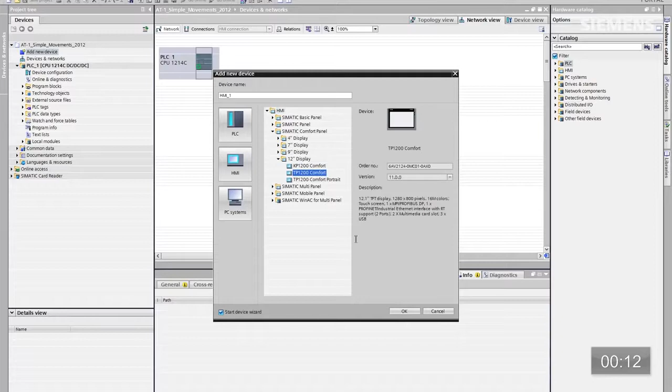So ultimately what the portal is doing for us at this point is creating a wizard for us. We're going to have a pop-up box that easily walks us through the entire HMI architecture we want to use for this particular system. There's a PLC connection as the first button. We're not going to use that. We don't care. Click on Next.

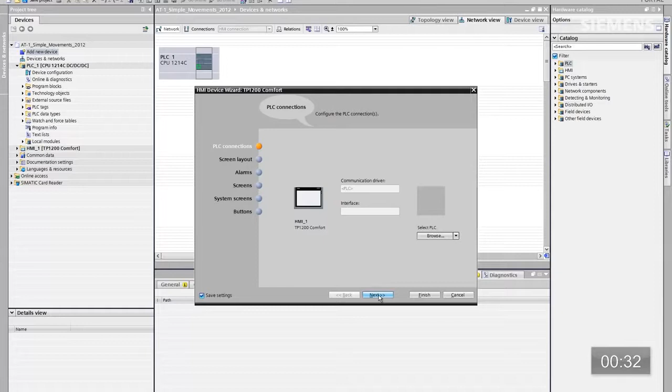You can change the background color here, screen title, navigation field, date, time, logo, whatever. We're going to leave those defaults. Here's the alarms. We're going to keep the defaults as well.

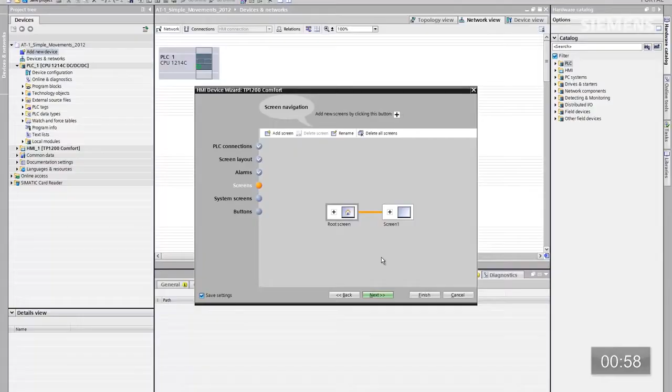The screens. Here you can create your standard architecture of your screens. That way every single time you have a new HMI you can easily go through the wizard and create those screens very fast and efficiently. We're going to leave root screen and screen 1, that's no problem. System screens, we're not going to use any.

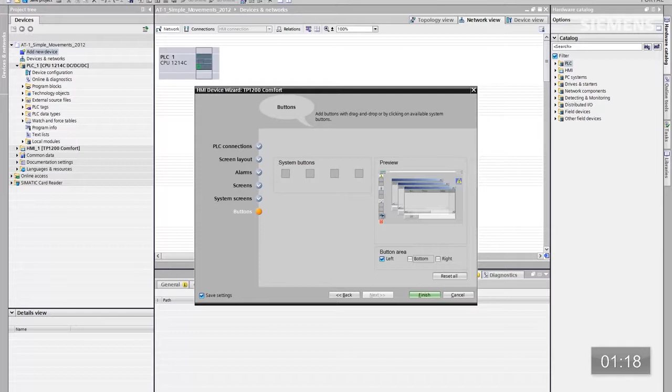And the buttons, as you can see, for instance, for this application I want to move them to the left instead of the bottom, and I can easily manipulate the system buttons onto this with just dragging and dropping them. And there are my system buttons on the left-hand side now.

At this point, I want to click on Finish. So ultimately, what the portal is going to do for us is give us a photorealistic view of this HMI and the screens we just created.

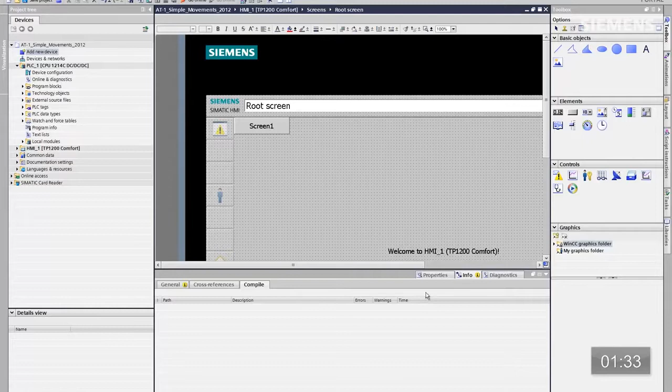Here they are. Let me minimize this and go to Fit to Screen. So here's our root screen.

If we want to add a new screen, all I got to do is go back here in the tree structure and just double click on Add New Screen. Again, it'll give us another photorealistic view of that new screen.

Click on Fit to Screen, and for instance, if you want to change an attribute of that screen, now that I have focus on it, I can right click on it, go to Properties, or if I want to change the name, that's what I want to do. Change it to 2. So now I have my root screen, screen 1, screen 2.

If I want to have navigation buttons for this root screen, all I have to do is drag and drop them on. There's root screen. There's screen 1. Now I've got my navigation buttons.

Now that I've accomplished the new screen and all the standard HMI architecture, what about actually tying it to the current code? Something I want to show you real quick. If I go back to Devices and Networks, you'll see now I have my current automation architecture including the new HMI, but they haven't been networked together yet.

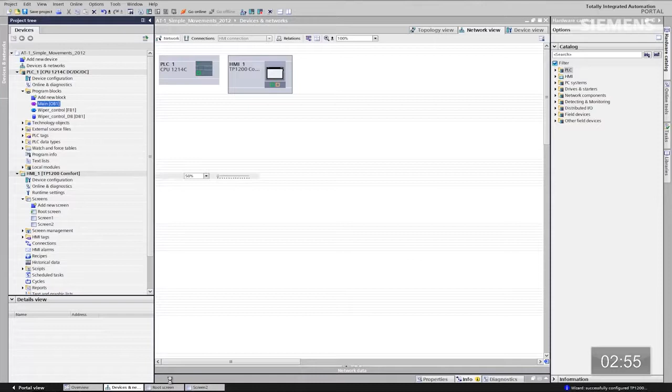If I actually go back to the code of the current control system, program blocks, main OB, let's double click on that. Now that I have the code of the automation architecture, I want to give focus to the root screen and choose split screen. So now I have the actual brand new root screen as well as the code from the current automation architecture.

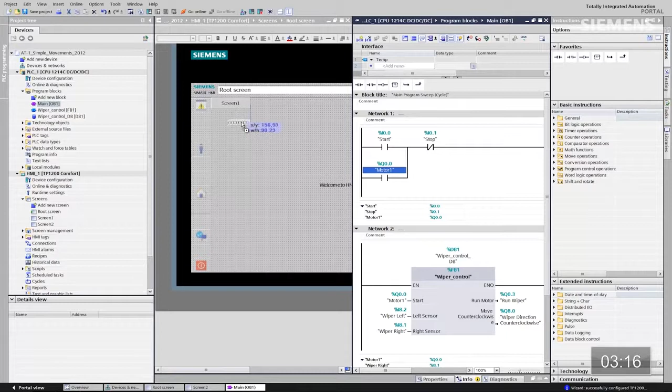If I want to tie them together, what I want to do is just go grab an I/O field from the code, drag and drop it on. And you see I get these little alignment bars just like you get when you do anything in PowerPoint. That way you can easily take boxes and make them align the way you want to.

If I want to resize, refit this I/O field, all I got to do is go grab one of the corners, drag it to wherever I want it to go. If I want to actually do an attribute change, just give focus to it, click on Properties.

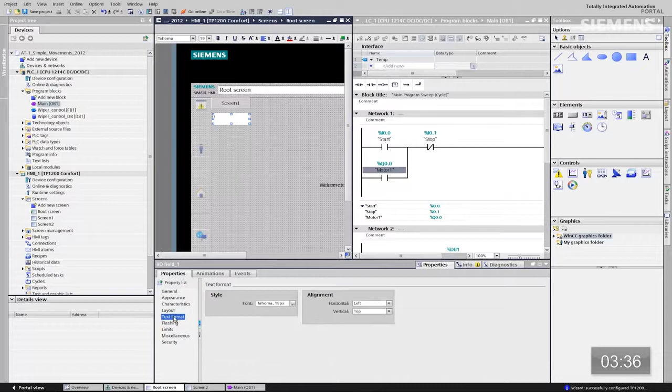Let's change the text size, for instance. Instead of 19, we want to use 32. Click OK, and I also want it to be centered. So now I've changed the attributes of this I/O field.

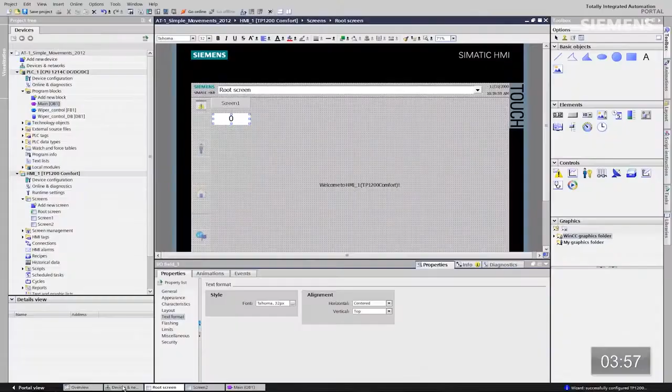Let me click off the split screen and let me show you the device and networks. So now if I click on this little icon here, Show Address Labels, the moment we pass that I/O field from the code to the actual HMI panel, it automatically created the Profinet network, the IP addresses, device names, including even the logical connections. It did everything in the background for us. That's how smart the portal really is.

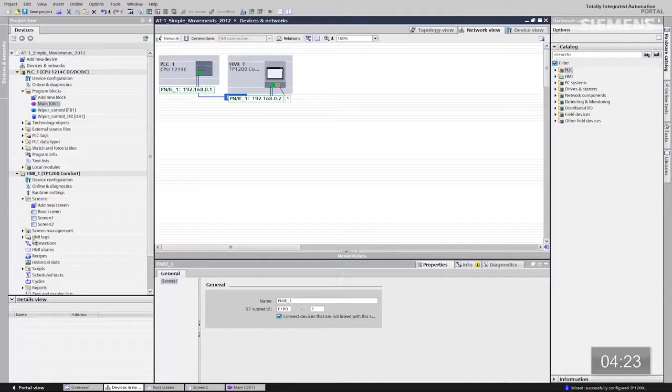Okay, so the network is now complete. How about the actual control? Let me go back to our root screen. Let me drop this down and let me go to our libraries.

So now I want to add buttons and switches. Let me give focus to that. So ultimately we're going to launch a library of different types of buttons and switches we could use for controlling. Now that we have them launched, let me go down to the rotary switches.

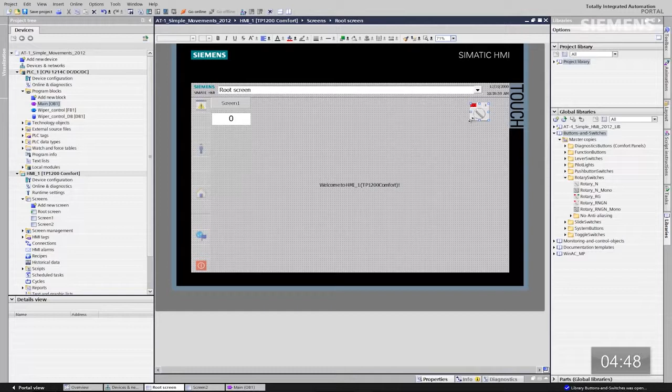Let me drag that on, resize and refit however I like. Then I can use the alignment bars to make certain everything looks good on this HMI screen. Give focus to it, right click, properties.

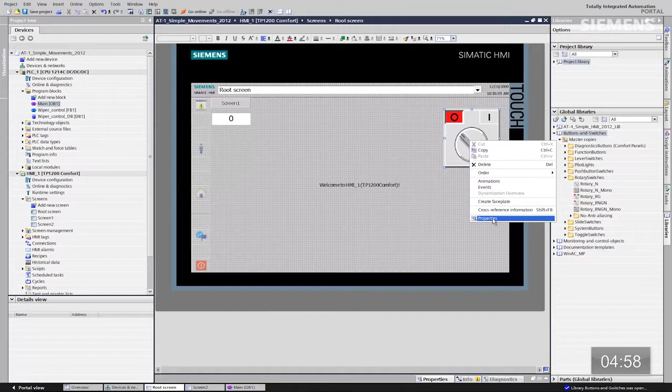Go to general, go to the tag, and since I know the code from the current automation system, I know exactly which tag I want to use to tie to this rotary switch so I have actual control between the two systems. Let's type motor 1, that's the one I want to use. Use smart type, there's the tag, so now our control code from this rotary switch to the actual code itself has now been tied together.

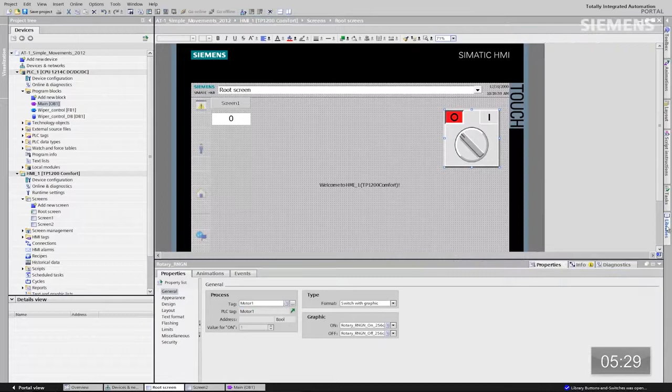Okay, how about animations? Let me give focus to this, and let's choose that library. So we have the ability from the global library concept to take any kind of graphic, animation, whatever you want. You can make it exactly how you want on your HMI panel. Once you've done that, you can save the global library, and every single time you have a new HMI panel come online, you just drag it onto the panel and you're actually completed and done. All you got to do is tie it to the code.

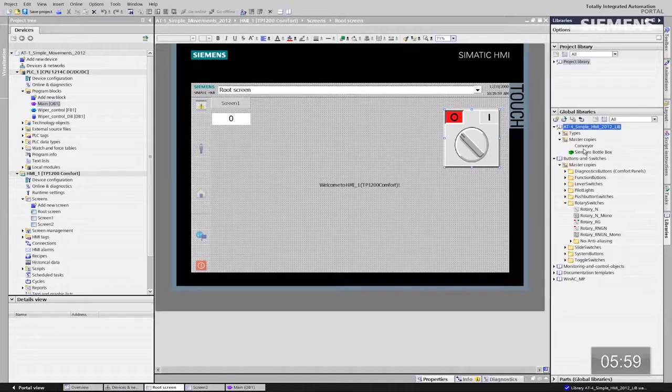Let's do exactly that. Let's drag this conveyor down. So we're going to have a conveyor on this panel. Resize, refit, and I'm going to have a Siemens bottle box.

Now that I have focus on him, I want to right click and go to properties, go to animations, and click on horizontal movements. So I can do an on-the-fly animation of a horizontal movement. It gives me a shadow box plus an arrow.

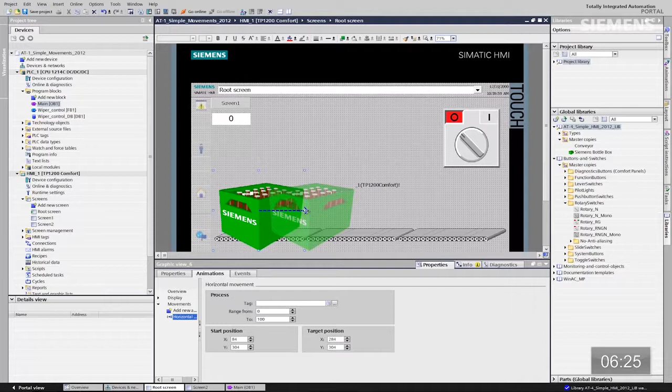If I go over here and give focus to it, drag that arrow over to the end point. So there's a point of start, there's a point of end. And this is going to be tied to an analog value. So let me go down here and type 27,000 because this will be an analog word. And the start point is going to be 1,000.

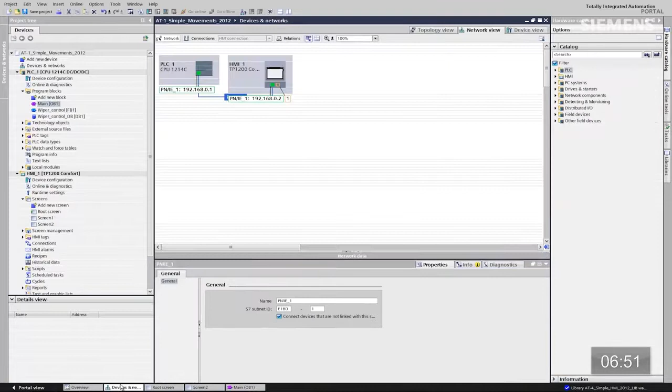However, I don't have a tag I want to use from our analog inputs, so let's go do that first. Let's go back to our device and networks. Give focus to the actual CPU.

Click on device view. Now give focus to the analog card, and you'll see that we have analog input word 112. That's the one I want to use. I'll also go back to a plus or minus 10 volts so that I have a full range of that analog word.

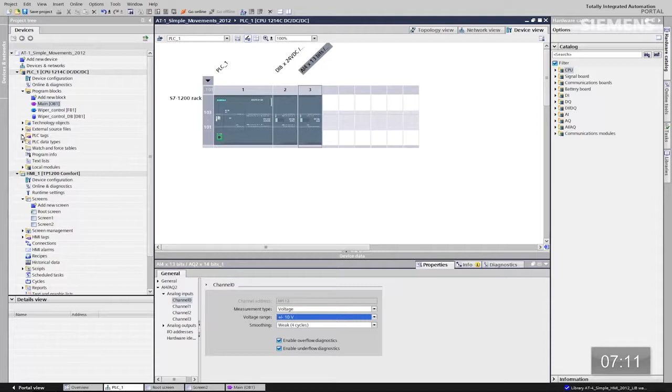Let's go to our tags, show all tags. As you can see here, all I have to do is type IW112, click enter. At this point, the tags will give you the possibility of creating the actual data type as well as the tag name for that analog word automatically. You don't have to do anything. I'm going to use this current tag it auto-created for me.

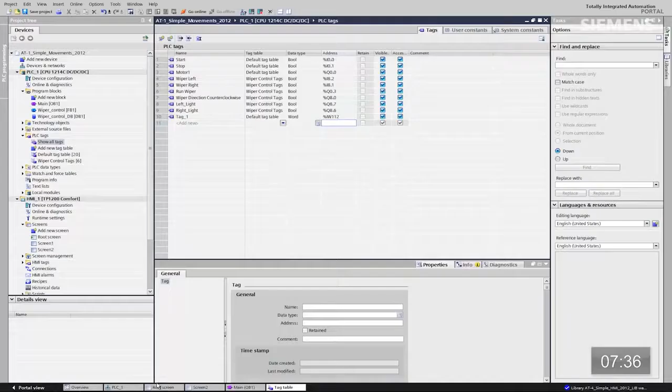That's fine. Let's go back to the root screen. Give focus to the actual bottle box. Click on animations and just click TAG, smart type. There is the tag 1, that's what I want to use.

At this point, I can give focus back to the CPU, click the download arrow button. What the system will do now is go out and search the network and try to find this automation system. It's going to give us a dialog box over Profinet. He's searching, he has found the IP address of that controller. I can actually click on the flash LED button.

So now I've clicked on that. It's actually going to go back out over Profinet. It is the correct controller at this point. I can click the load button. So now what he'll do is a quick compilation of this analog word and this tag and the logical connection over Profinet to the control system for us. Click on load. Now we've loaded that simple connection.

What I want to do now is give focus to the HMI, and you'll see this little box up here is called the Start Simulation. I'm clicking on this. Ultimately, we have the ability to virtualize an HMI panel. You don't have to have the physical hardware to do it. We can tie that directly to the automation system and prove out the fact that that system works before you have to actually go out and buy the hardware.

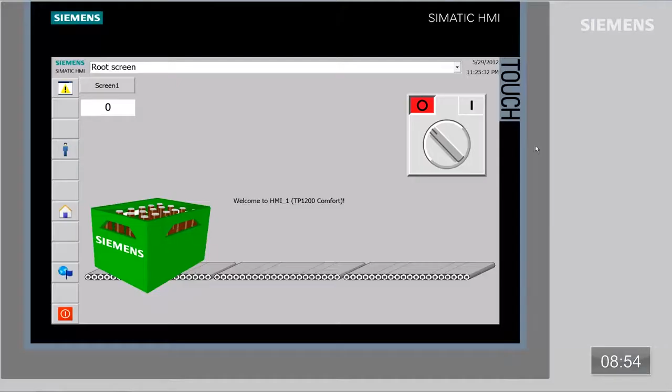Let me give complete focus to it. So you can see here we have the virtualized panel at this point. Our bit field is 0 and our switch is in the off position. If I click on the switch, you can see our motor is running now and our bit field's gone to 1, so that means that we are in run mode. If I turn that switch off, you can see everything has gone back to a steady state and it's stopped.

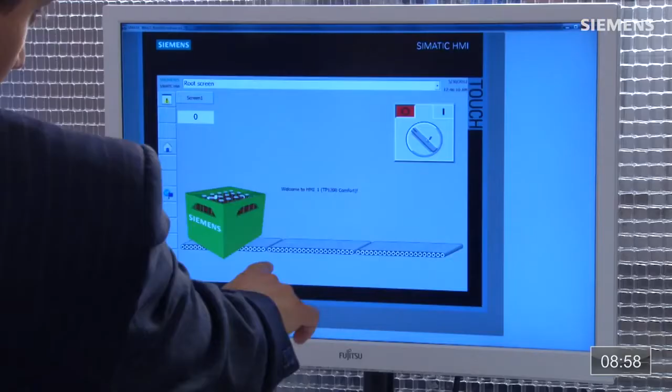If I come back to the analog potentiometer, I can come over here and move the bottle box, and I'm able to do the entire animation of this bottle box, including all this HMI. I did it in a matter of minutes. Now that's engineering efficiency.